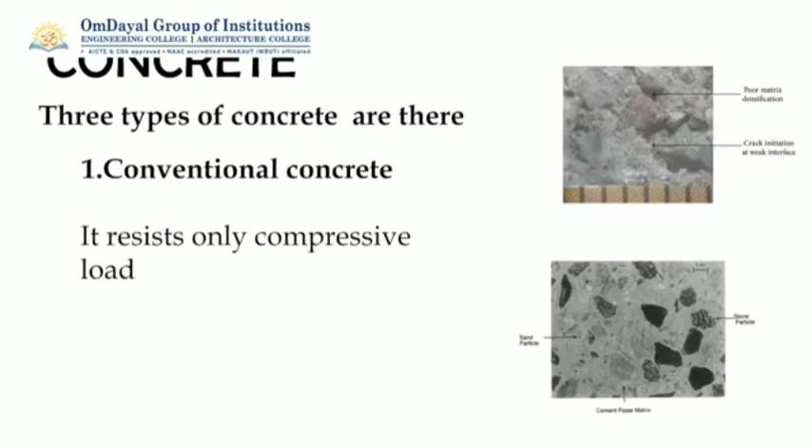Concrete. Three types of concrete are there. Number one is conventional concrete, which was initially expected to resist only compressive loads. Number two is non-conventional concrete, which is task-specific, environmental friendly, and cost-effective. Number three is pre-stressed concrete, which is a form of concrete where initial compression is given in concrete before applying the external load.

Adhesive is also known as glue, cement, paste, which is non-metallic substance applied to one or both surfaces of two separate items. Finishes comprise plastering, pointing, painting, varnishing, and distempering.

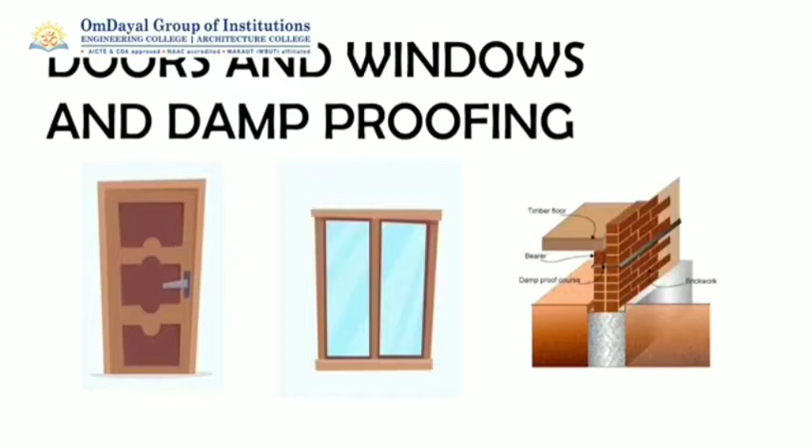In our third semester, we have studied about the materials which are used for doors, windows, and damp-proofing course. Window has basically two parts: one is window casing frame and another is window shutter frame. Window frames are made of timber, steel sections, aluminium sections, concrete, and stone. And the window shutter frame is made of timber, steel sections, and aluminium sections.

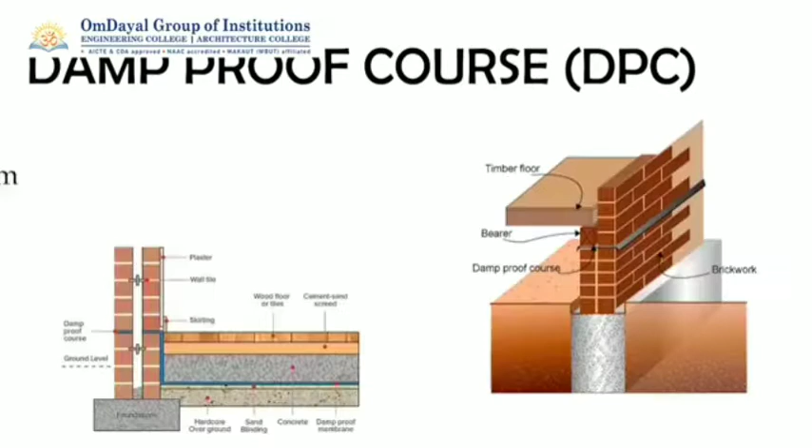The door has also two parts: one is door casing frame and another one is door panel. Door casing frames are made of timber, steel sections, aluminium sections, concrete, and stone. Door panels are made of timber, mild steel sheet, corrugated steel sheet, hollow metal, metal covered plywood. Damp proof course is a course which prevents building from moisture for a long time.

In our fourth semester, we have studied about lintel. It is a horizontal structural member which is placed over the openings like doors and windows. Timber, stones, bricks, reinforced concrete, steels, and reinforced bricks are generally used in lintel.

We have studied about arches also in our fourth semester. Various types of materials like bricks, stones, wood, monolithic concrete, precast concrete, reinforced cement concrete are used in arch construction.

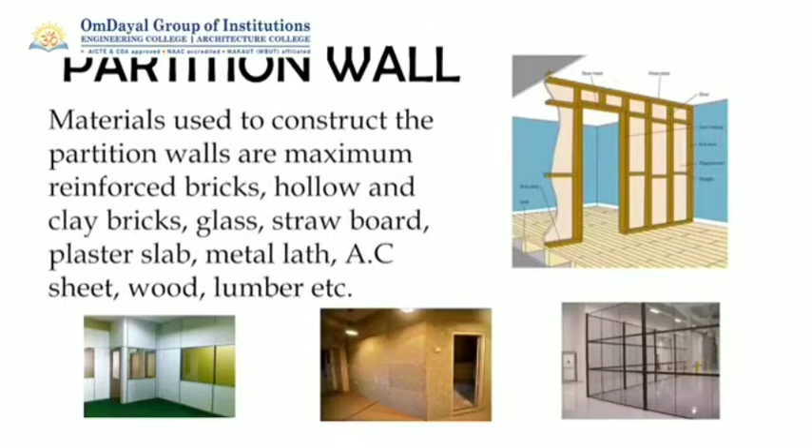In fifth semester, we have studied about partition wall. Generally, the materials used to construct partition walls are reinforced brick, hollow and clay brick, glass, straw board, plaster slab, metal lath, AC sheet, wood, lumber, etc.

Roofing was also studied in our fifth semester. Roofing is an essential part of a building construction. Roofing material is mostly dependent on the climatology of the location of the building.

There are also some new materials that are being introduced in the market. These are known as advanced materials. These materials include polyvinyl chloride, fiber reinforced plastic, etc.

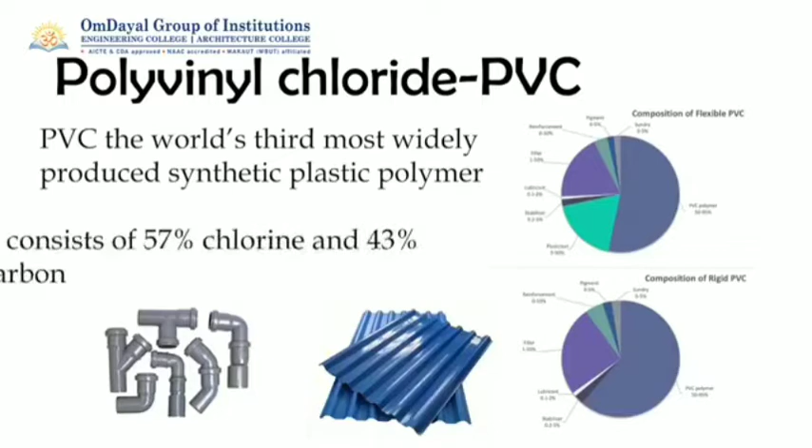Polyvinyl chloride is the world's third most widely produced synthetic plastic polymer. It consists of 57% chlorine and 43% carbon. Fiber reinforced plastic is also the excellent choice of material for the construction of chemical storage tanks, piping systems, etc. There are many other materials that are more durable and fire resistant than the older materials we generally know now.

Foundation. In our third semester, we studied about foundation and its types. Foundation is a substructure placed underground that anchors the building to its position. Foundations are of two types: shallow foundation and deep foundation.

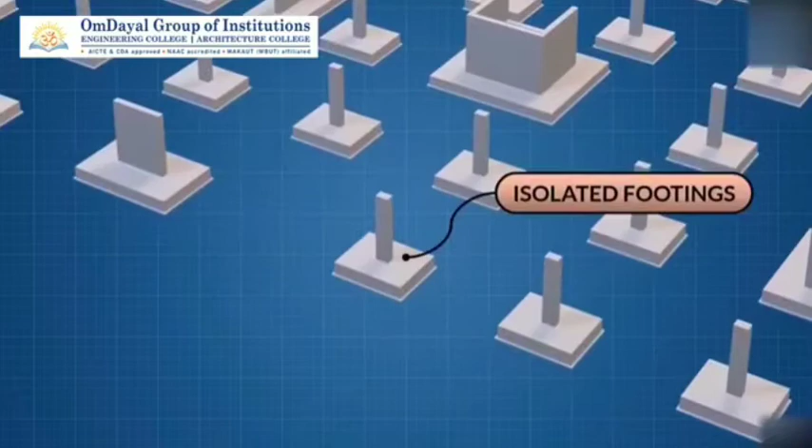Shallow foundations are mainly used in low-rise buildings. The types are isolated footing, combined footing, strap footing, strip footing, and raft or mat footing.

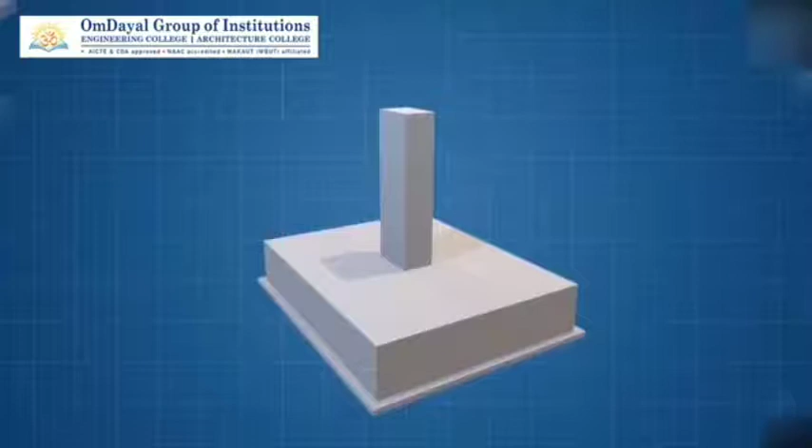The foundation takes the load from the superstructure in the form of vertical or lateral loads or moments. In return, the soil exerts a reaction force upwards that tends to bend the base. The top part comes in compression and the bottom part in tension.

Therefore, the main reinforcements are provided in the bottom. This is how the reinforcement steel bars are provided.

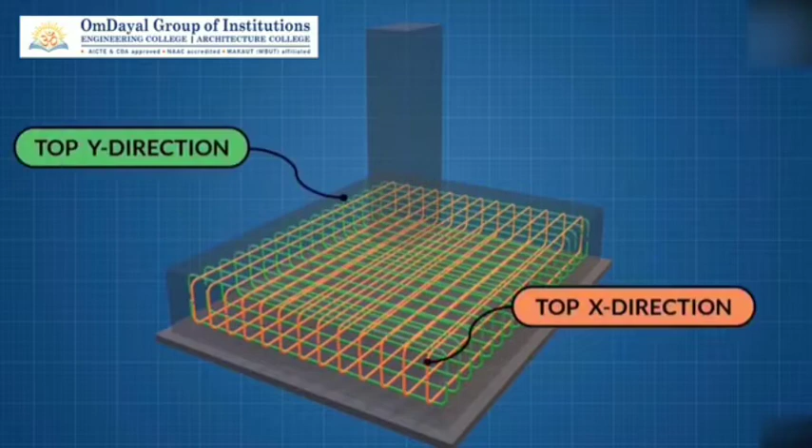After learning about the foundation details, we hand drafted the detail sheets of isolated footing and combined footing. The sectional details and the reinforcement bar placements are detailed in these sheets.

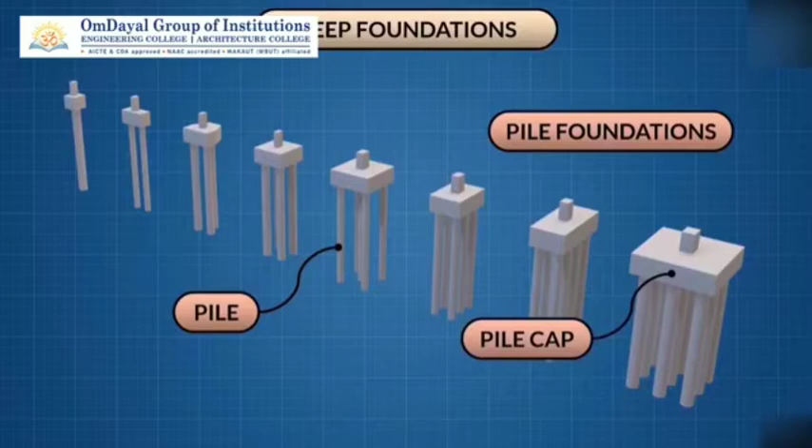Deep foundation is mainly used in high-rise buildings. Piles are long column-like structures made of reinforced concrete or steel. Piles are topped by a pile cap that helps to transfer the load from the superstructure.

Here, in this sheet, we drafted the reinforcement details of pile foundation along with the pile cap details.

Brick bonds. In third semester, we studied about brick bonds and its various types. Brick is a type of block composed of dried clay which is used to build pavements and other various elements of masonry construction. The largest surface of brick is called stretcher. The shorter surface is called header, and the depression of the top surface is called frog.

Four types of brick bonds are generally used in brick masonry. Number 1 is stretcher bond. Number 2, header bond. Number 3, English bond. And number 4, Flemish bond.

Stretcher bond is the commonest bond used today and the least interesting in appearance. It is used mostly in interior settings because of its thickness of one half of a brick. Header bond is a masonry bond consisting of header courses exclusively. It is mostly used for residence and safety partition garden boundary walls.

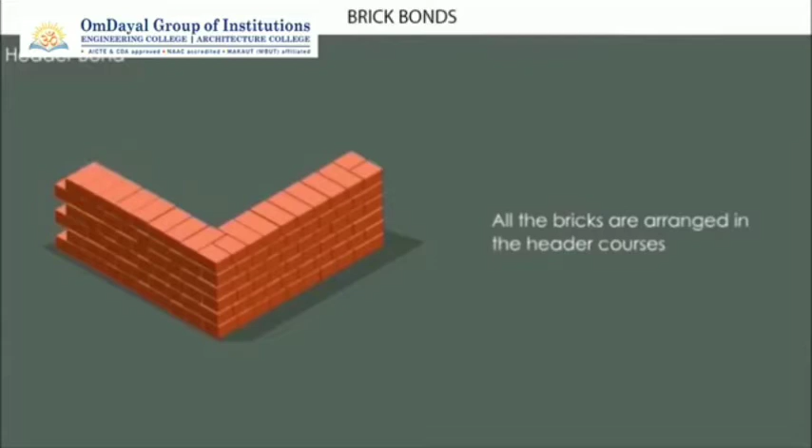English bond consists of alternate courses of header and stretcher bond. This is the most commonly used bond for all wall thicknesses. In this bond, the vertical joints of the header courses come over each other. Similarly, the vertical joints of the stretcher courses also come over each other.

This bond is considered to be the strongest bond. In English bond, every alternate header comes centrally over the joint of two stretchers in the course below.

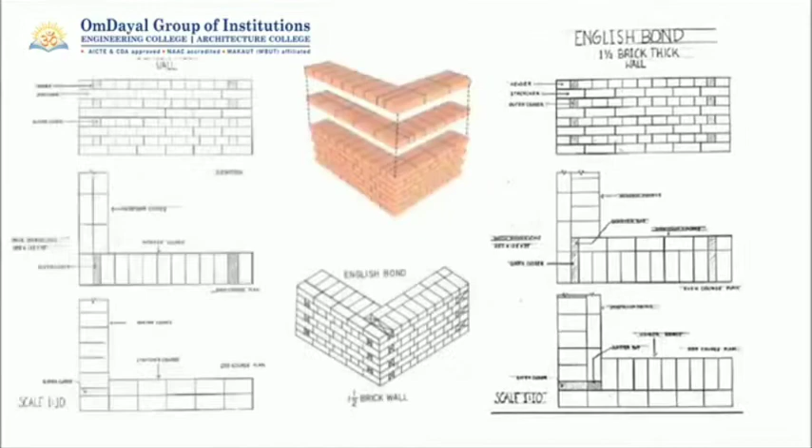Walls of even multiple of half bricks, for example 1 brick thick wall or 2 brick thick wall, present the same appearance on both faces. Walls of odd multiple of half bricks, for example 1.5 brick thick wall or 2.5 brick thick wall, will show stretchers on one face and headers on the other face.

Another one is Flemish bond, which is a brick construction pattern of alternate stretchers and headers for each course. This is very acceptable because it is economical, as brick bats are used. On the other hand, more mortar is used due to the use of bats. But it is hard to build and is comparatively less strong for wall thickness of more than 30 centimeters.

In Flemish bond, partly incessant vertical joints appear in the structure. A double Flemish bond has a similar appearance from both sides of the face in the front and back elevation. In single Flemish bond, the exposed surface of the wall consists of the Flemish bond.

And the backside surface consists of English bond in each course.

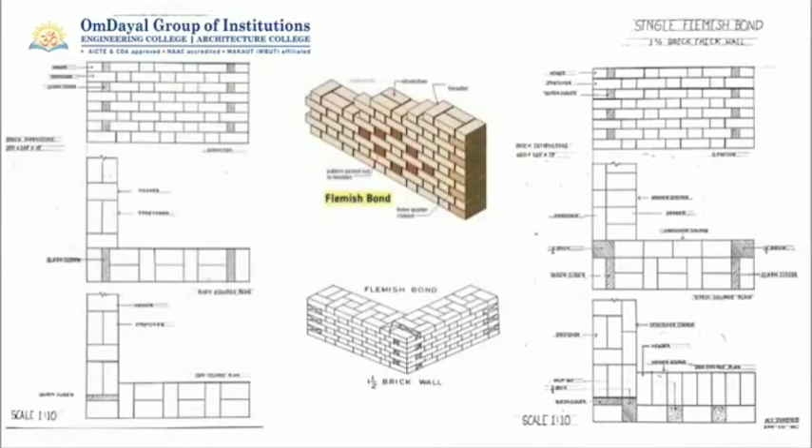This is stone masonry. We have studied about stone masonry and its types in our third semester. Stone masonry is basically of two types: one is ashlar masonry and another one is rubble masonry.

Ashlar is finely dressed stone. In ashlar fine masonry, each stone is cut to a uniform shape. In chamfered masonry, a strip is provided to 25 mm depth at a 45-degree angle, which is why the exposed face is chamfered.

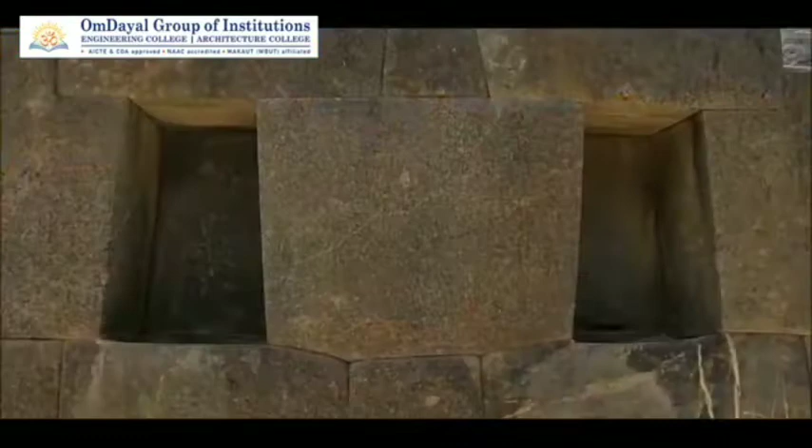Rubble masonry is a type of stone masonry in which the stones are used as obtained from nature. It is roughly dressed with wider joints, in contrast to ashlar masonry wherein stones are given a fine finish and joints are also kept thin.

Rubble masonry is more preferred than ashlar because there is difficulty in dressing most types of stone. And for economical construction also, ashlar masonry is quite costly. That's why rubble masonry is more preferable than ashlar masonry.

Rubble masonry is of two types: one is square rubble masonry and another one is polygonal irregular rubble masonry.

In square rubble masonry, stone faces are given a straight finish, and voids are filled with mortar and stone chips. In polygonal rubble masonry, the stones are roughly hammered and pitched into irregular polygonal shapes.

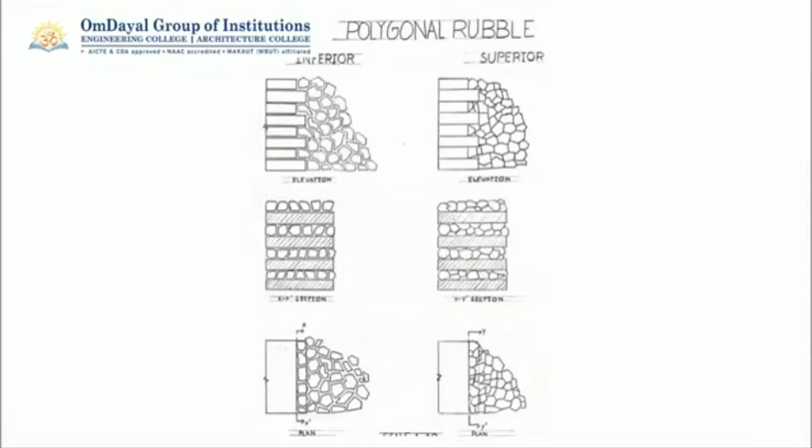The following sheets are from our 5th semester on various types of partition wall.

These are some photographs of hollow clay blocks, which are generally made up of clay or terracotta and are hollow on either side. In reinforced brick, wire mesh or hoop iron or steel bar is provided.

Plaster and concrete partition is constructed by setting 2 by 2.5 cm channels vertically and fixing metal strips. Strips are galvanized with iron wire or mild steel bar. It can be either precast or cast in situ. Special concrete posts are used for the construction of this wall.

Timber partition wall consists of a wooden framework which is either supported on the floor or on the side wall, and is not suitable for damp locations, neither soundproof nor fireproof, but lighter in weight and easy to construct.

Timber framed glass wall consists of glass surrounded with a combination of solid and engineered wood. This type of wall consists of a wooden framework and provides good aesthetics.

For steel frame glass partition wall, the framing is done with steel and this provides maximum sound insulation and security. Mostly this wall can be seen in modern offices, restaurants, and cafes.

At first, steel framework is done and then plaster boards are used on both sides. As a modular, versatile, demountable panel, they can be quickly erected to any configuration required and come in a variety of specifications.

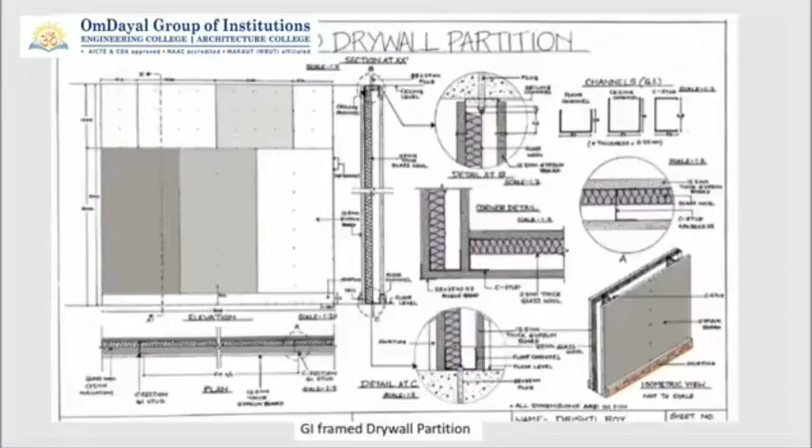Next slide is about GI frame drywall partition wall. Drywall materials include plywood, wood pulp, asbestos cement board, and gypsum. This is a soundproof wall.

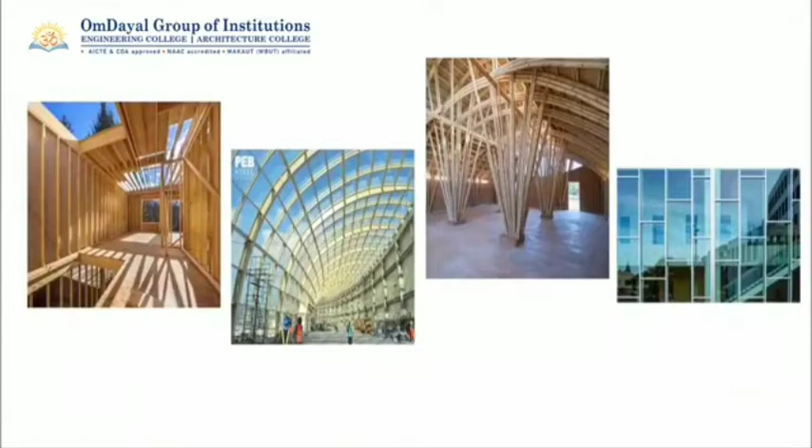Advanced building materials represent a new generation of construction materials which demonstrate exceptional properties. Through this, new technologies are integrated into both residential and commercial buildings and infrastructures to make them smarter, more sustainable, energy efficient, and secure.

The following sheets are based on our assignment to design a stage backdrop. The aim of the design was to make a simple but eye-catchy backdrop for the stage by only using aluminum composite panels.

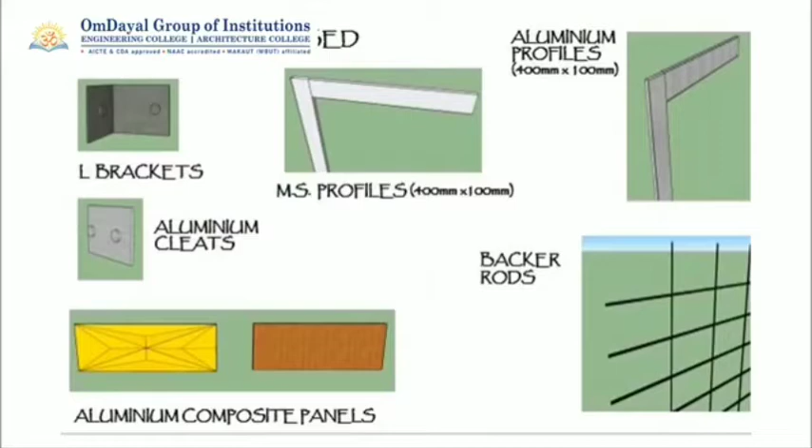The mostly used materials are L bracket, MS profile, aluminum cleats, backer rod, and two types of ACP sheets. The first type is extruded gold finish one, and the second one is the wood finish flat ACP.

At first, L brackets are fixed on the wall, then the basic framework is created using the MS profile, and after that it is overlapped by aluminum profile. Then ACP sheets are placed, and backer rods are run between the grooves.

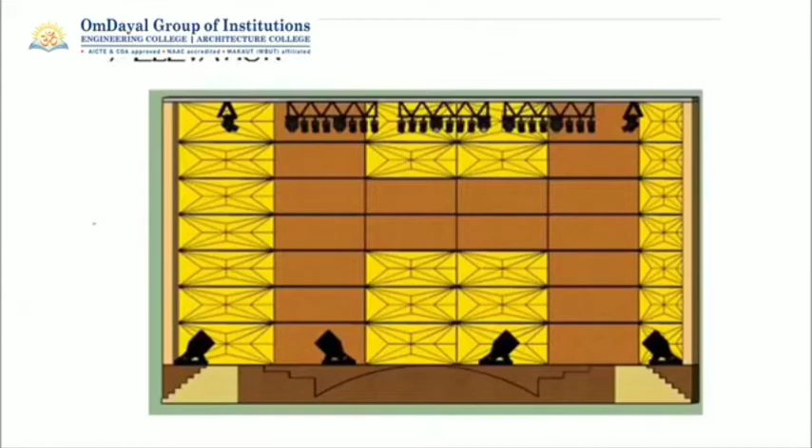The design has been done surrounding the idea of contrast and texture. The contrast developed between the shiny extruded and matte finish flat appearances of the ACP is the main design concept. The band of wood finished ACPs running in between the gold ACPs breaks the monotony of the backdrop while also emphasizing the whole design. The 3D form of the ACP panels will create different visualization of the backdrop.

For the other one, the inspiration is taken from the De Stijl art movement, emphasizing the strict cubic form with primary colors. The design was done for a NAAC room wall where the achievements will be hung. The basic framework is installed with holdfast on the wall, then ACP layers are added. Finally, the logo is placed on the transparent vinyl sheet.

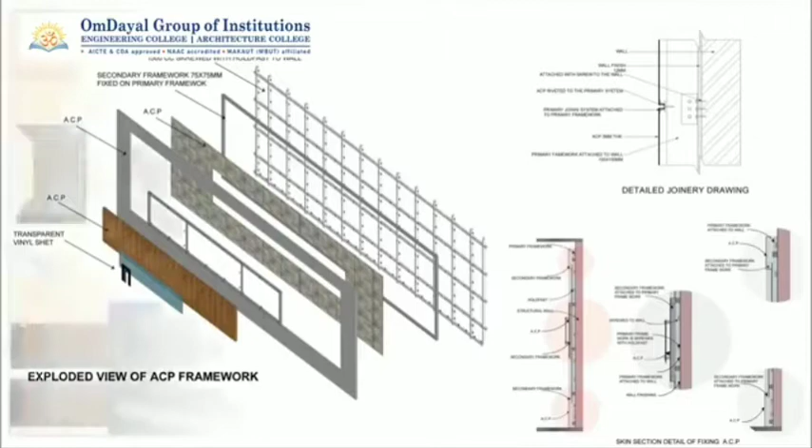And lastly, these are some other examples.

A segmental arch is a type of arch with a circular arc of less than 180 degrees, sometimes also called a scheme arch. A flat arch is an arch with a flat lower or inner curve.

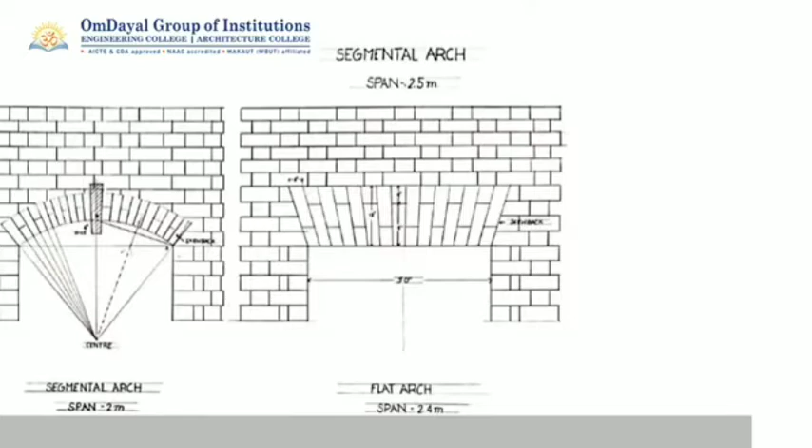Some other types of arches are lancet arch, equilateral arch, horseshoe arch, three-centered arch, and four-centered arch. A lancet arch is one of the varieties of pointed arch in which each curve of the arch has a radius longer than the width of the arch.

Equilateral arch is a two-centered pointed arch in which the chords of the curve are equal to the span. Horseshoe arch is also called a Moorish arch or a keyhole arch. It can take a rounded, pointed, or lobed form.

Three-centered arch: an arch whose inner curved surface is struck from three centers, resulting in a shape of one half of an ellipse. Four-centered arch is a low, wide type of arch with a pointed apex. Its structure is achieved by drafting two arches which rise steeply from each springing point on a small radius.

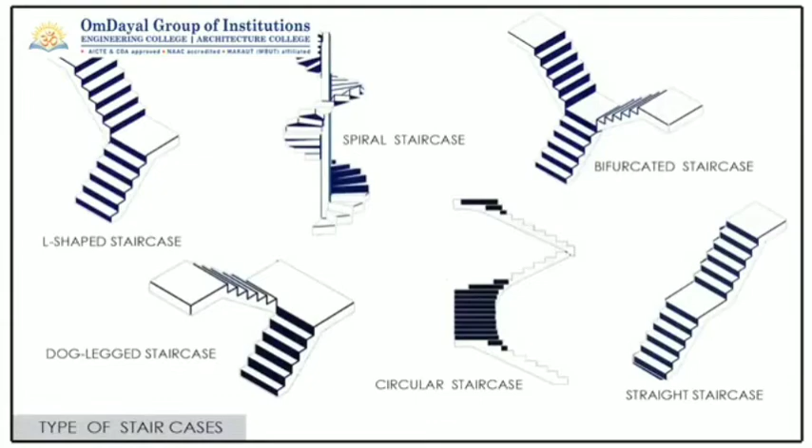Staircase. In our fourth semester, we studied about staircases. The different types of staircases are L-shaped, dog-legged, spiral, circular, bifurcated, and straight.

L-shaped staircase. Dog-legged staircase. Spiral staircase. Circular staircase. Bifurcated staircase. Straight staircase.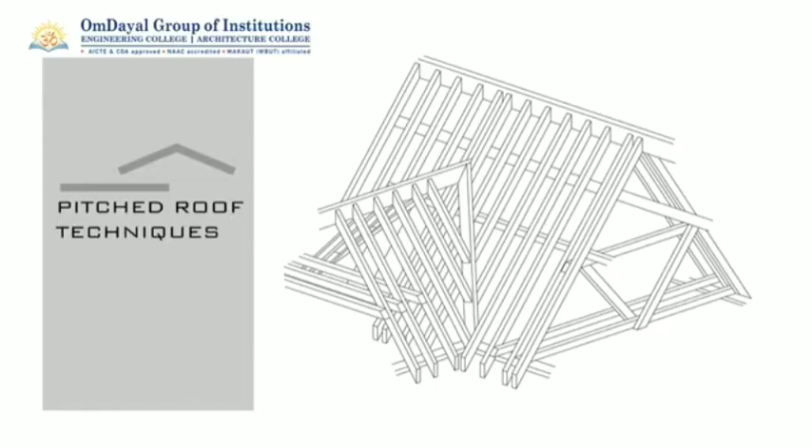In our fourth semester, we got to know about the pitch roof and its building techniques. What is a pitch roof? A pitch roof is a roof that slopes downward, typically in two parts, at an angle from the center ridge.

Here are some of the sheets which are drafted by us in our 4th semester, which contain the detail of the pitch roof and its different parts. This sheet contains the plan of the pitch roof, the section of the pitch roof, the detail of the edges of the pitch roof, and some elaborate drawing of the pitch roof.

In this sheet, we can see a different type of pitch roof which is covered with interlocking tiles, and its main supporting members are rafters and joists.

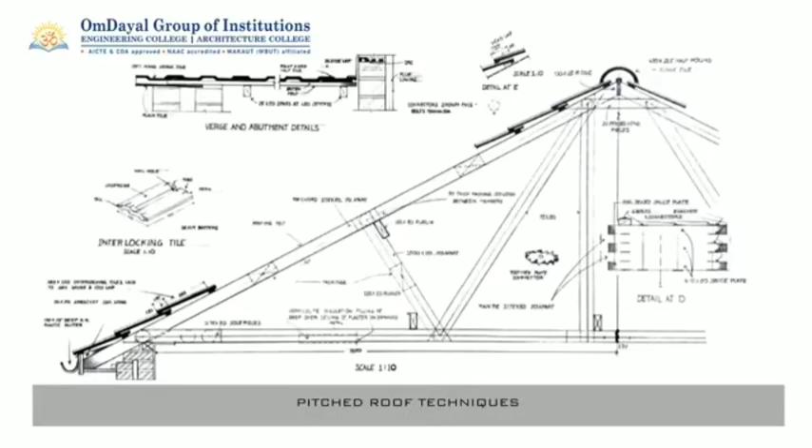Now there is a small video regarding the roof construction technique in which we are using joists and rafters for the roof construction. Rafters are rectangular section and they fit nicely on the wall plate.

Another type of section used in construction of roofs are purlins, which are associated with struts, and they provide extra support to the rafter, adding extra strength to the roof. The purlins are found at right angles to the rafters, and struts are found on every 4th rafter. Then there are hangers which are found at right angles to the joist, keeping a strong roof.

In the following slides, we are going to learn about the floor slabs which you learned in the 4th semester. A floor slab, also known as a plate slab or filigree slab, is a reinforced concrete slab with a minimum thickness of 5 to 6 cm. Depending on the concrete covering and reinforcement, it can be up to 7 cm thick. Now in this slide there are shown steel joists.

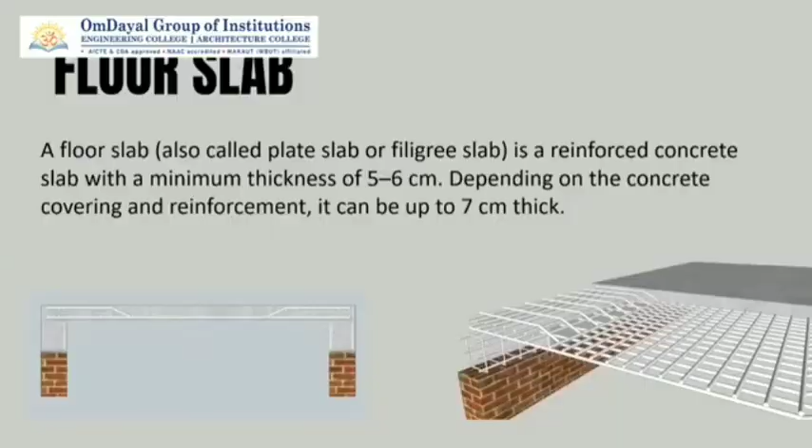The steel joists are open web lightweight steel trusses consisting of parallel chords and a triangulated web system, proportioned to span between bearing points. There are 5 main components of a steel joist: the top chord, bottom chord, end web, bearing seat and interior web members.

In this slide we can see details of a jack arch roof and how it is constructed. A jack arch roof is composed of arches made of either brick or lime concrete. In this animated video we can see the construction of a jack arch roof.

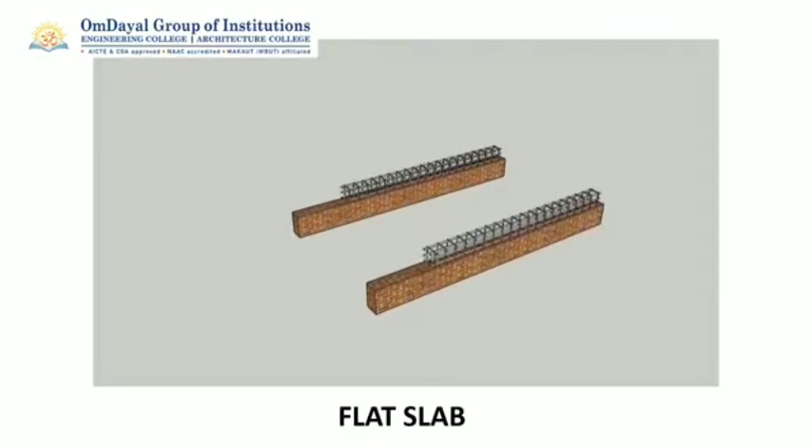In this slide we can see the plan, elevation and sections of a flat slab. In this following animated video we can see the construction of a reinforced flat slab.

We have learnt about the types of wooden joineries and the construction system in the 2nd and 3rd semester. A joinery is a part of woodworking that involves joining pieces of wood or timber to produce more complex items. We have studied the making of these wooden joineries in the 3rd semester.

First, in this slide it is shown a fish joint. When it is desirable to join 2 members without reducing their section to a certain extent, then that joint, as shown in the figure below, is known as a fish joint. Here are some animated videos showing the construction of the fish joint, strap and bolts joint.

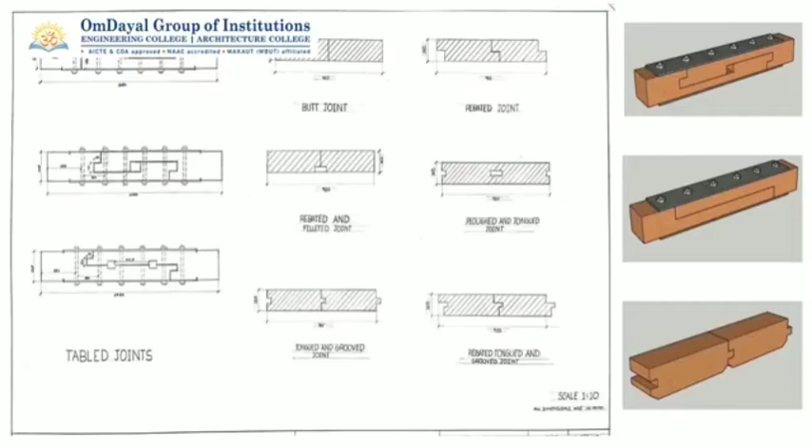In this slide we can see the table splice joint, butt joint and lap joint. Table splice joint is another variation of the half lap joint. Butt joint: the end of a piece of wood is butted against another piece of wood. Lap joint: when the end of a piece of wood is laid over and connected to another piece of wood, it is known as the lap joint.

These videos also help us explain the construction systems of the table joint, matched joint and V-joint.

In this slide we can see types of widening joints. Widening joints are used to make wider boards by joining the narrower ones edge to edge. These videos help us understand the construction systems of the angled half joint and the bevel half joint.

Now in this slide there are shown many types of joints like the dovetail joint, notch joint, mortise and tenon joint, and chase mortise joint. A dovetail joint, or simple dovetail, is a joinery technique most commonly used in carpentry, including the making of furniture, cabinets and traditional timber framing.

Mortise and tenon joints are strong and stable joints that can be used in many projects.

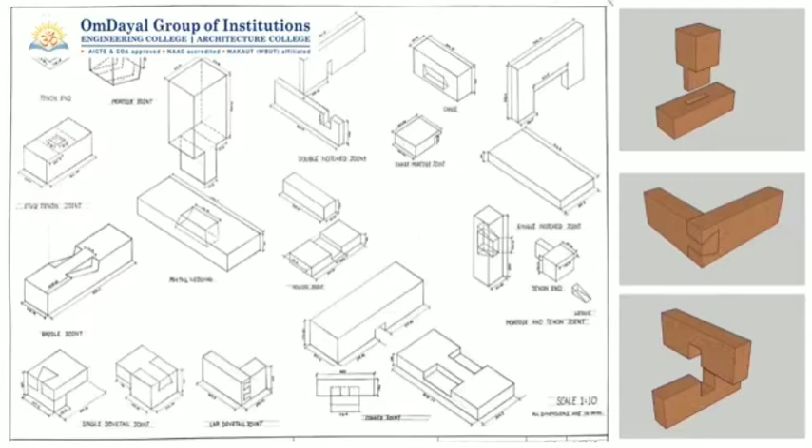Here are some animated videos and also a video of our respected teacher showing the construction of a dovetail joint, along with animated videos of the types of dovetail joints.

In this slide we can see many types of joints shown like a housed joint, miter joint, bird's mouth joint, and oblique tenon joint. In the housed joint, the whole end of one piece of timber is accommodated or housed for a short distance into the other piece, the construction of which our respected teacher is showing.

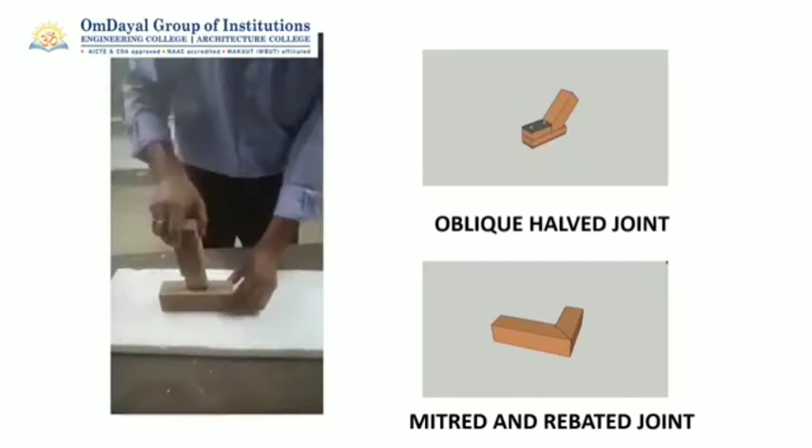We have learned about doors and windows in the 2nd and 3rd semester of our course.

There are different types of windows with different structure and function, such as fixed windows, casement windows, awning windows, double hung windows, etc. Let's have a look at the ventilation openings of the most common window types.

Fixed windows, no matter what size, offer no ventilation at all. Next is the awning window, which severely limits the amount of opening and offers very little ventilation in respect to its size. For the larger ones, the lower panes are normally fixed, which further reduces the amount of ventilation.

Sliding windows have a fixed pane of glass which prevents ventilation. In larger ones, additional fixed panes can be found which further restricts the ventilation.

In double hung windows, half of the window pane is fixed, so the ventilation through it is moderate. For larger ones, the portion of fixed panes increases and the ventilation amount decreases.

As casement windows open perpendicularly, they allow ventilation through the entire window area. For larger ones, 1/3 of the window pane is fixed, which decreases the amount of ventilation.

Louvered windows have no fixed panels; the blades open horizontally. This type of window allows ventilation through the entire part of it. Even for large ones, the amount of ventilation is comparatively higher than any other windows. So if we represent graphically the amount of ventilation these kinds of windows offer, here comes the result.

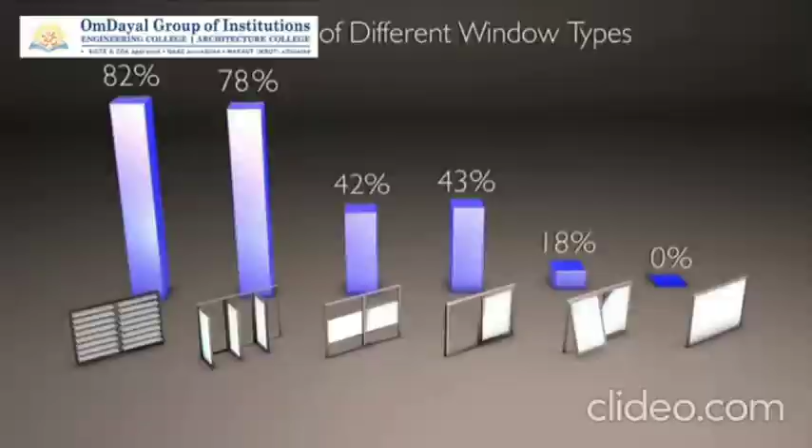The size and materials of a door may vary as per the location and their requirements. For a toilet, the door size is kept minimum; for a room it is moderate; and for other areas the size of a door increases. The materials and size of a door depend on the users of a particular place.

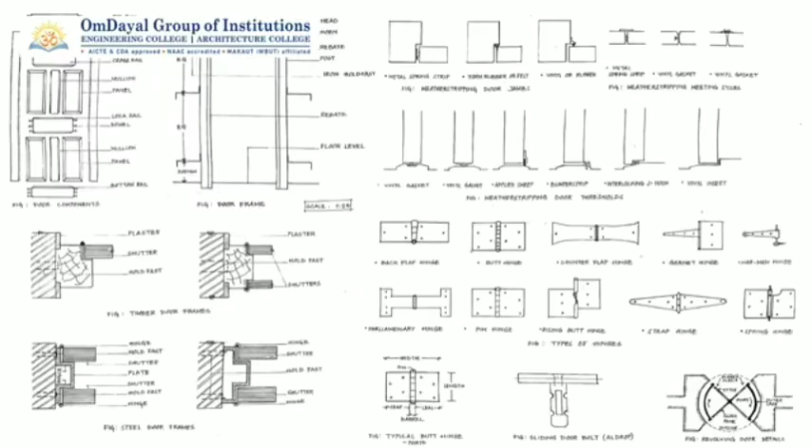We have also learned about choosing the location of a door or a window. For the best space utilization, the number of doors should be kept minimum, but at least 2 openings should be there. If there are 2 doors in a room, they should preferably be located in opposite walls facing each other so as to provide good cross ventilation and free circulation of air in rooms.

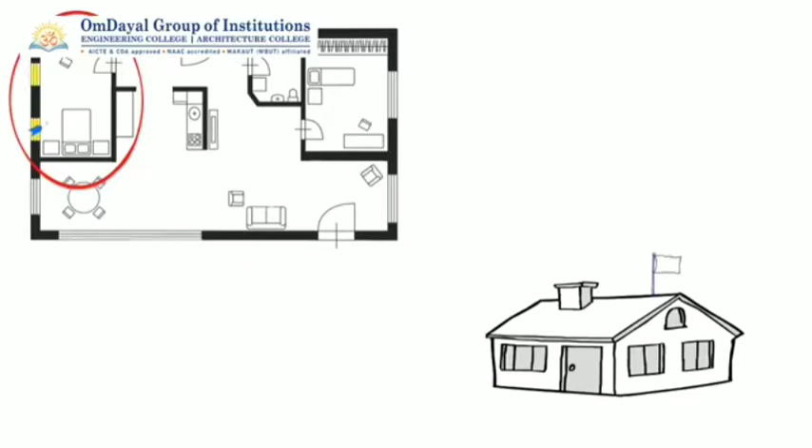If the windows are placed adjacently, the cross ventilation works very poorly. If in a room the openings are in only one wall, or the windows are placed adjacently, the possibility of cross ventilation becomes very limited. According to the National Green Building Standard, for proper ventilation, the size of the window should be 15% of the total conditioned area.

False ceiling is a topic which we study in 5th semester - metal furring. Suspended ceiling is a secondary ceiling hung below the main ceiling, also named as drop ceiling or T-bar ceiling. Its purpose is basically aesthetic at residences, and also insulating and acoustical at commercial buildings.

Here one type of metal furring suspended ceiling is drawn by us. Here we have shown the reflected ceiling plan, isometric views and all the details about components.

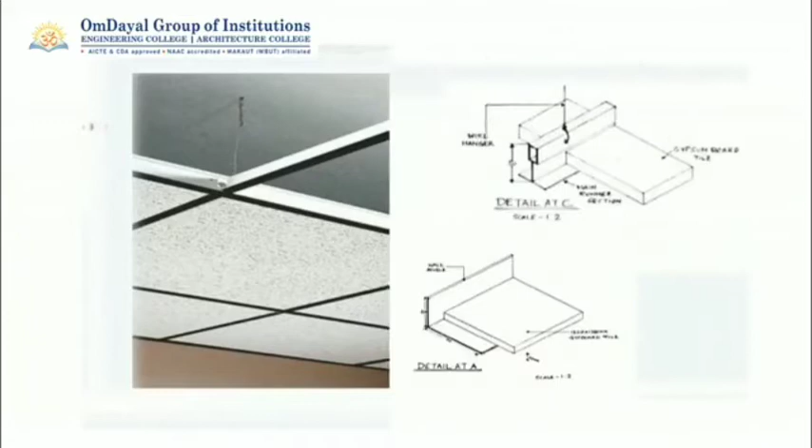Another type of ceiling is BPB grid ceiling. Here we have shown the ceiling plan, section and isometric view, and we have also done some details of wall angles, and the joint of main runner and cross runner. Here the wire hanger provides the suspension from the structural ceiling.

BPB ceiling tiles are used in conjunction with the Casoline grid ceiling system. This is a new design from BPB which is highly popular in both Europe and UK because of its specially designed characteristics in terms of sound control performance, aesthetics as well as durability.

In this sheet we have drawn all the details of gypsum board drop ceiling. This is basically used for acoustical purposes at theatre halls as it has highly sound absorption property. It is lightweight, flexible and fire and moisture resistant.

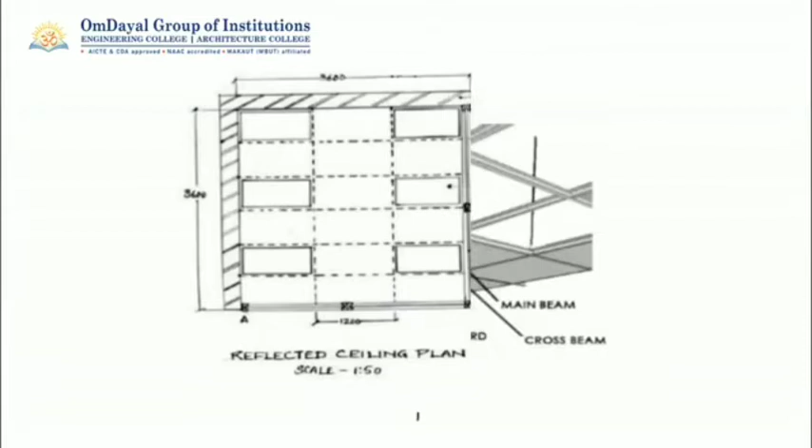Gypsum board panels are tough and economical and are fast replacing other ceiling materials such as plaster of Paris, as they are used for renovating old ceilings too.

Working drawing: drawings for the proper construction of a building, for carrying out the various trades in accordance with the design or intention of the architect, and for obtaining estimates of cost. They consist of plans, elevations, sections and details augmented with specifications. Purpose: the primary role of working drawings is to convert design data into construction information and to clearly communicate that information to building industry code officials and fabricators.

Municipal drawing or sanction drawing: these are the drawings prepared for obtaining sanction for the project. The sanctioning authorities have their own checklist of drawings to be submitted. Purpose: to get sanction from competent authority before starting actual work, to check whether the proposed construction is as per bylaws or not, and to decide the taxation of the building by municipal authority.

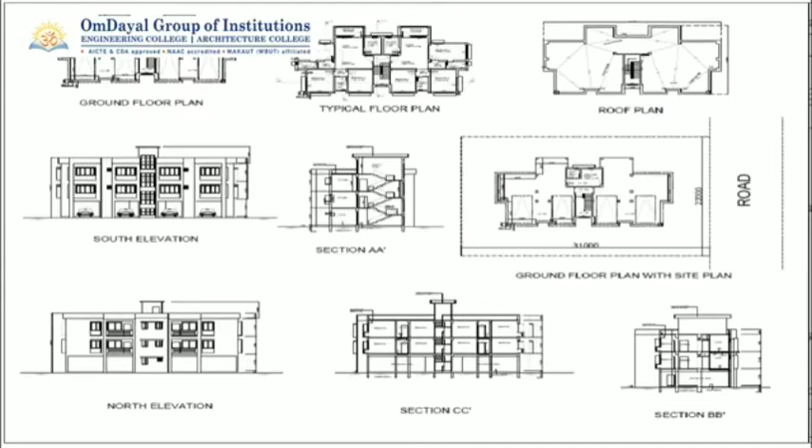Without sanction of drawing, any construction if constructed is illegal. At villages, the drawings are sanctioned by panchayat. At town by municipal bylaws, and in cities by corporation bylaws.

For getting approval of the plan, also even after approval, number of copies are required for obtaining financial assistance, electric supply, water supply connection, etc. These copies of plan can be obtained by ammonia print.

We have studied plumbing services in 5th semester. Public water supply consists of collections, conveyance, treatments and distribution. Water is conveyed from the street mains to the individual building through service connection and collected in underground tank.

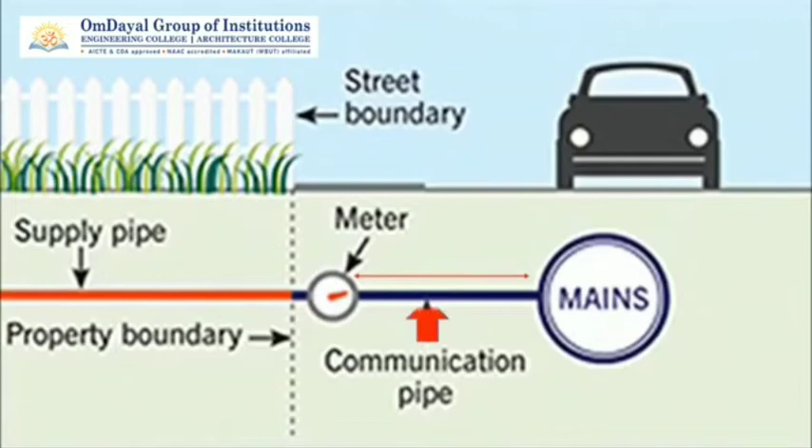Service connection consists of two types: communication pipe and supply pipe. The pipe which runs from the municipal distribution mains to the boundary of the premises is known as communication pipe, and the pipe which runs inside the premises is called supply pipe. In this picture, we are able to see the details of service connection.

Internal water distribution system depends upon the size and height of the structure. These are the basic methods of distribution system depending on the pressure of the water and gravity. Direct supply system: in case of buildings which are not more than 2 floors, and if adequate pressure is available in the mains, supply of water is directly given to various floors for sufficient hours.

Indirect supply system: when the pressure in the mains is not sufficient, the water is pumped directly to the overhead storage tank, and from there water is distributed to different floors by gravity.

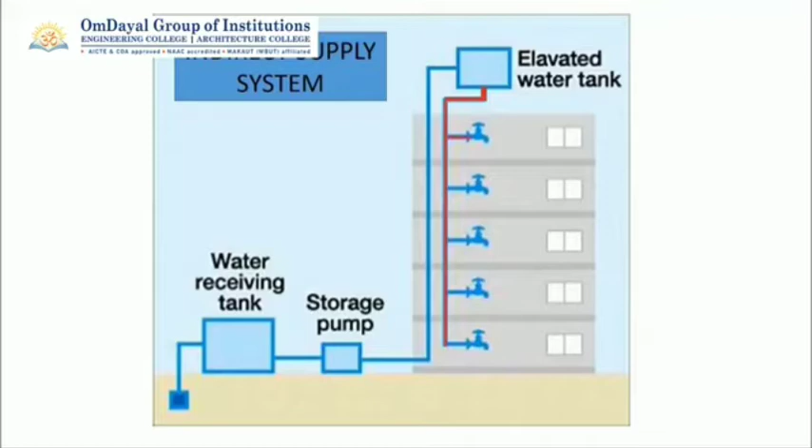Gravity system: in this system, water flows under gravity without use of any external energy to deliver water from source to consumer. Water distribution system for a town depends upon the level of the source, topography of the area, and some other local conditions. In this sheet, we have discussed about pumping system and combined gravity and pumping system.

Pumping system: treated water is directly pumped into distribution mains without storing. This method is not generally used.

Combined gravity and pumping system: this is the most common, efficient and economical. Treated water is pumped and stored in an elevated distribution reservoir, then it supplies to consumer by action of gravity.

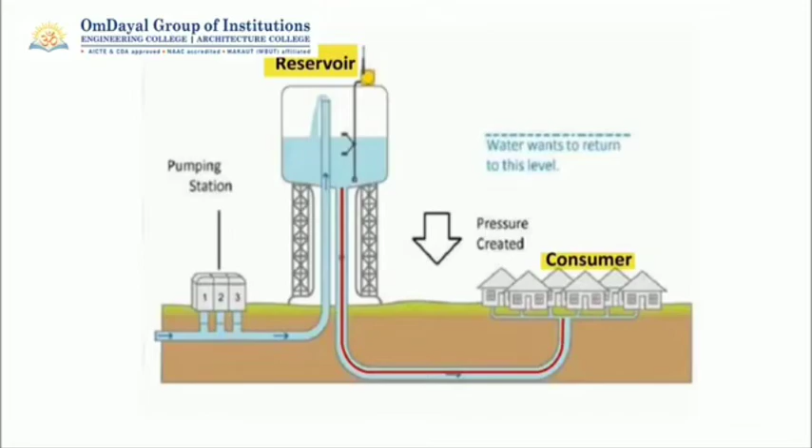We all know about the importance of light in our life. It stimulates our sight and makes things visible to us. Architectural illumination is the lighting that applies to the built environment. Lighting in museum is important for displaying the exhibits and for the movement of the visitors. Gallery lighting requirements vary with function, type and the size of work.

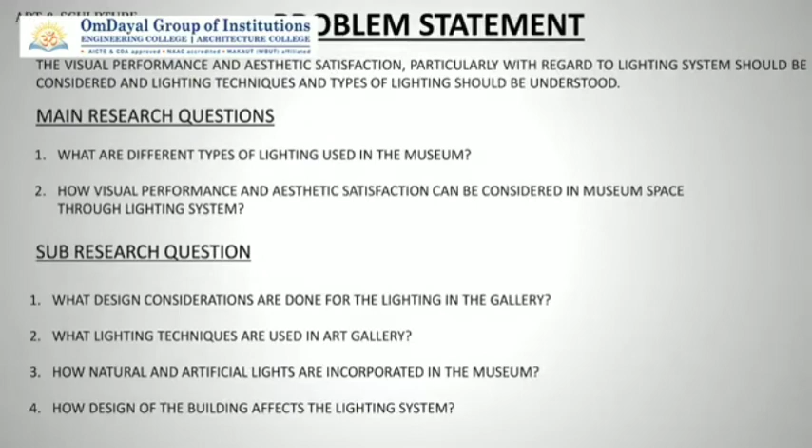When many different objects are displayed in a single exhibit, lighting designers must sometimes light the space so that certain objects are illuminated with bright or dim light, light that is warm or cool, using deep or shallow angles and a variety of fixtures and sources. As many art museum exhibits change frequently, lighting design must be flexible and easy to customize for new objects and collections.

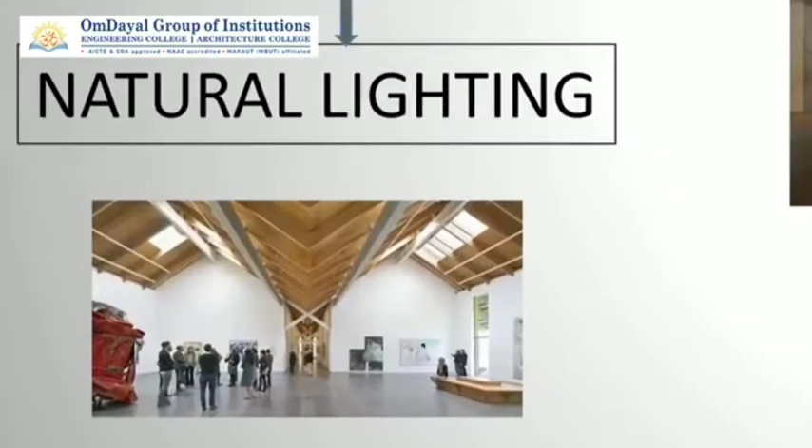Museum lighting can be done in two ways: natural lighting and artificial lighting. Natural light plays a major role in museum construction and design. It is of two types: top lighting and lateral lighting.

There are a few advantages and disadvantages of the top lighting system. There are three types of top lighting: skylight, atrium, and roof monitor.

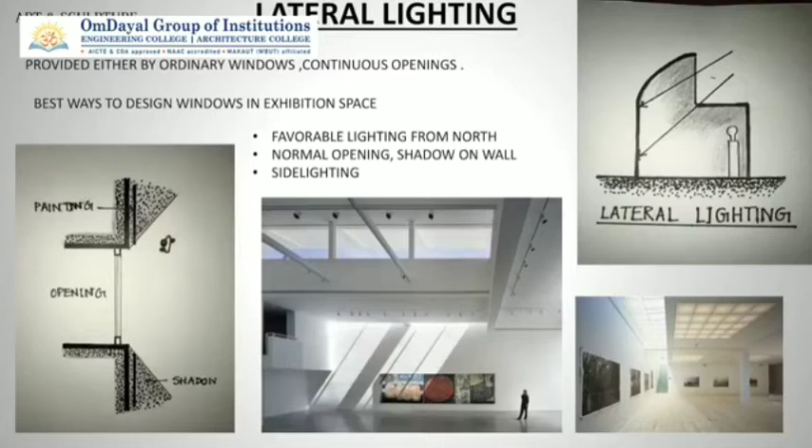Lateral lighting is provided either by ordinary windows or continuous opening. Best ways to design windows in exhibition space are: 1. Favorable lighting from north, 2. Normal opening shadow on the wall, 3. Side lighting. There are 4 types of lateral lighting:

1. Vertical windows, 2. Horizontal windows, 3. Clerestory windows, 4. Window wall. The factors of daylight design considerations are as follows.

1. Site building to maximize daylight availability. 2. Building orientation. 3. Building form. 4. Use of low-rise buildings for greater daylight access. 5. Use of the atrium to maximize core daylight.

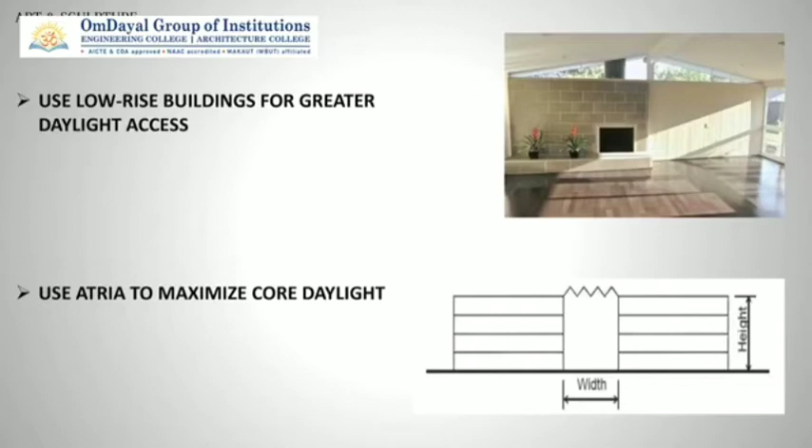Artificial lighting is the light that we get from the electric source. The form of the lighting can be divided into two types: 1. Diffuse lighting, 2. Directional lighting. Some different types of artificial lightings are luminous ceiling lighting, indirect luminaries, cove lighting, wall washer, spot lamps.

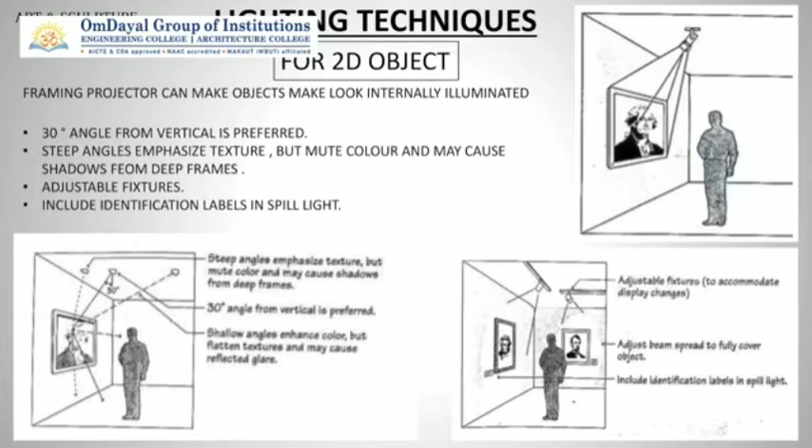For 2D objects, a 30-degree angle from vertical is preferred. Steep angles emphasize texture, but mute color may cause shadows from deep frames. Adjustable fixtures include identification labels in spill light.

For 3D objects, lighting techniques can be divided into 5 types: directional lighting, point lighting, area lighting, spot lighting, and global illumination. Apart from creating a good visual environment for the audience, the museum's lighting environment should also focus on protecting exhibits and reducing the damage to cultural relics caused by light radiation.

It is observed that lighting plays a decisive role in the display space. Guggenheim Museum is a good example where we can find fine use of natural and artificial lighting. The 45-degree plastic louvers have been placed to deflect the sun rays. For the best use of light, all the walls, including the floors and ceilings, have been painted with high reflectance matte white.

When it comes to exhibition areas, lightings have to be very carefully designed, as it should not only convey the brilliance of the exhibit but also maintain the overall lighting required. This is done either by natural or artificial lighting, or by a combined strategy.

The intent of this research is to explore qualitative aspects regarding lighting used in museum architecture and the psychological impact of lighting on human behavior.

In the 7th semester, we study structure in architecture. This subject teaches us about the different types of structural systems in advanced architecture. This is a sheet done by us.

These are the classifications of form active systems: number 1, tensile structure; 2, cable structure; 3, pneumatic structure; 4, arch structure.

Tensile structure is a common type of thin membrane structure which only carries tension stress, and no bending or compression. In the next slide, you will see a small animation or video regarding a tensile structure.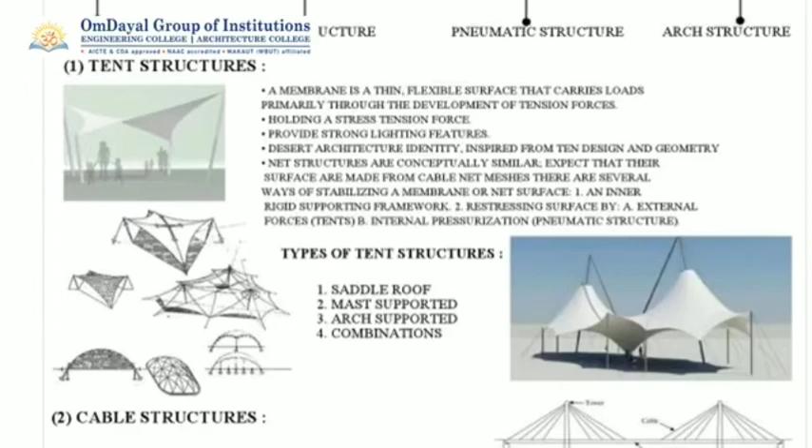Cable structure comprises non-rigid, flexible cables shaped in a certain manner and fixed at the ends to span the space. Pneumatic structure is a membrane which carries load developed from tensile stresses.

Arch structure: an arch structure is a curved surface that spans over an elevated space. These are some of the examples of the structures we learned before.

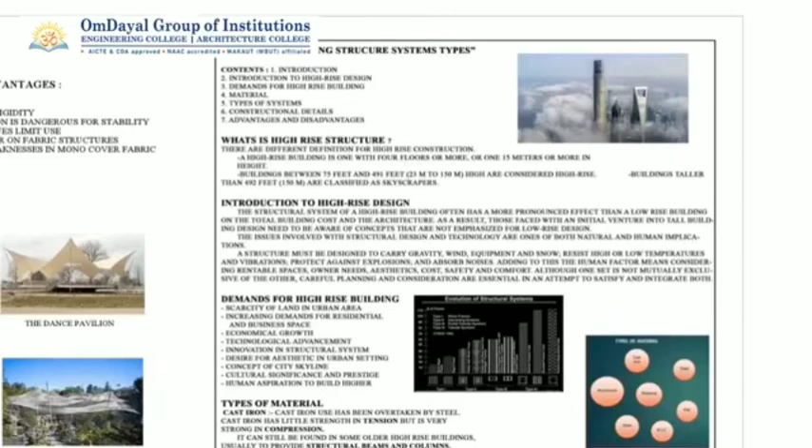High-rise building structures are buildings between 75 feet and 491 feet, and taller than that are classified as skyscrapers. Some materials used in these buildings are cast iron, float glass, etc.

Vector active structure system: this system consists of linear members joined together with hinge joints, in which members develop either axial compression or tension but no bending. Classifications are flat truss, curved truss, space truss, and tree truss.

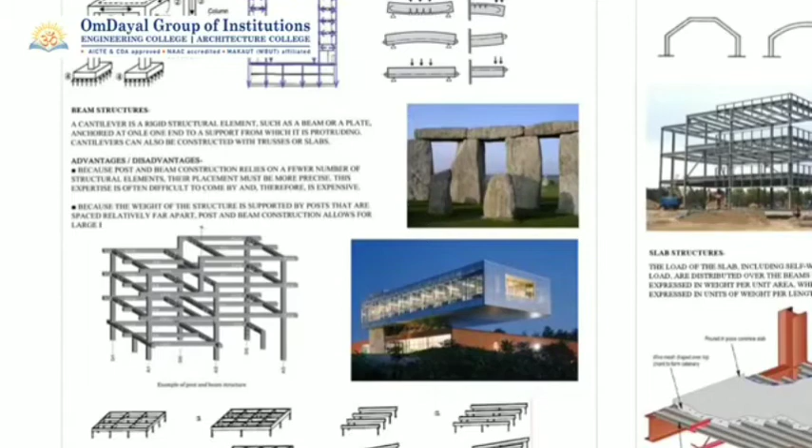Shell structure: a shell structure is defined as a curved structure that is capable of transmitting loads in more than two directions. These are the different types of shell structure: number 1, single curvature shell structure; number 2, double curvature shell structure. Under single curved shell structure, there are barrel shell and conoid shell.

It is a very sustainable structure that can bear a lot of load and does not break easily. There is a snack company called Pringles which uses this shape for the snacks, which makes the product non-fragile and keeps it intact so it does not get broken into small pieces. In the next slide, you will see a small video on this structure.

Climatology is the study of climate and how it changes over time. It is a very important aspect in architectural designing.

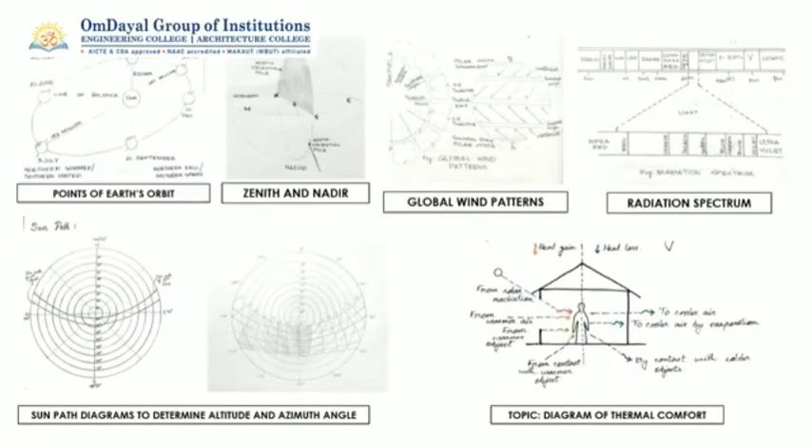These are a few basic concepts of climatology. Points on Earth's orbit show the climatic variation on Earth due to revolution around the Sun. Zenith and nadir are the two poles of the horizon.

Global wind pattern shows the different wind patterns of the northern and southern hemisphere. Radiation spectrum shows the different radiation, emphasizing the visible spectrum range. Sun path diagram is used to determine altitude and azimuthal angle. Diagram of thermal comfort shows the ways of heat gain and heat loss inside a building.

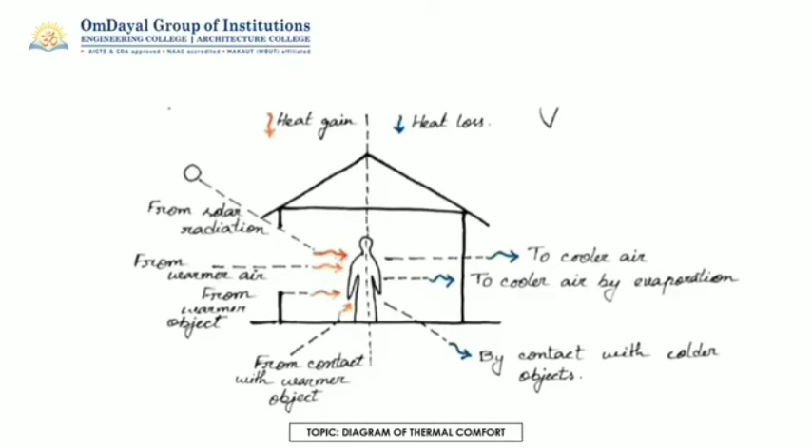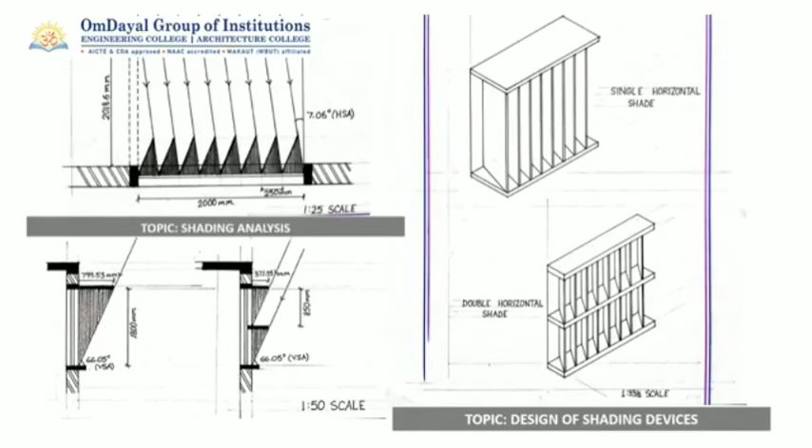Fenestrations and shading devices. Shading devices are mainly of two types, horizontal and vertical. These are used to protect the interior of the building from excessive solar radiation and precipitation.

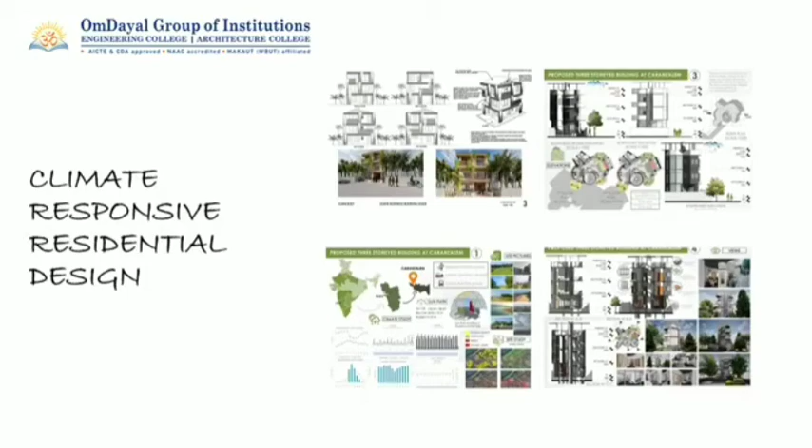We were assigned to design a climate-responsive building for a given climatic condition. The first project was to design a 3-storey building at Caranzalem, Goa. Goa features a tropical monsoon, warm and humid climate. The sun path diagram shows the daylight hours and shadows obtained for the building.

The graphs here show the average temperature, rainfall, wind speed, humidity and sun hours. Here are some pictures of the site and its locational details. After the studies, this is the proposed site plan.

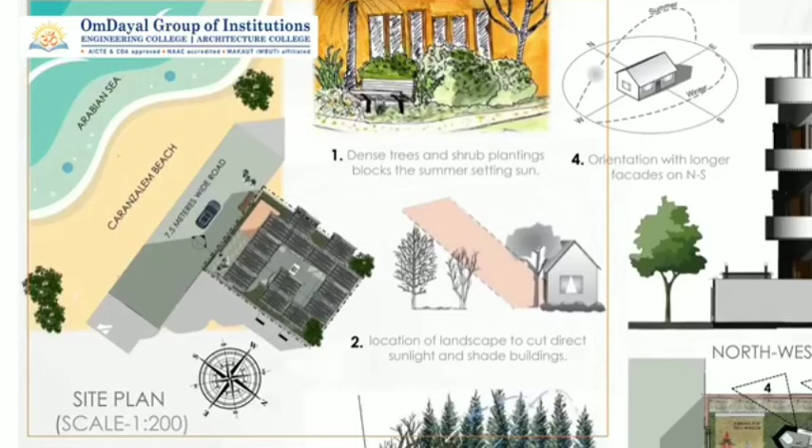The concepts taken are plantation of dense shrubs and trees for blocking the summer setting sun and providing natural shade by cutting the direct sun rays. The positioning of the trees is kept such that it can cut the strong winds. The orientation of the building is kept north-south, and the geometry of the envelope is kept circular.

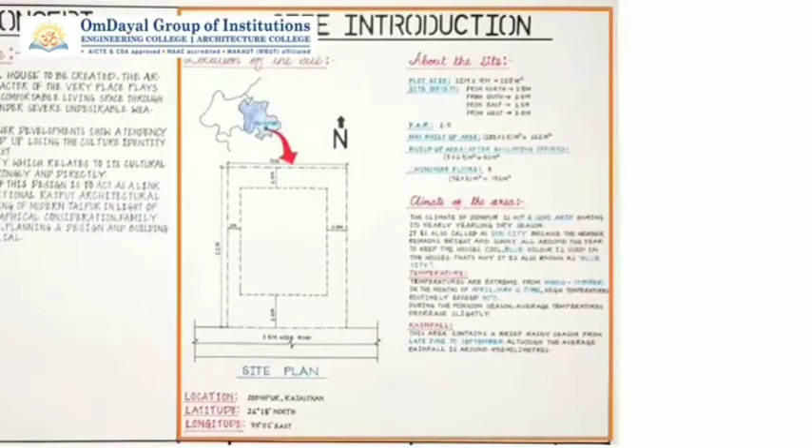The second project was to design a climate-responsive building for Jodhpur, Rajasthan. The climate of Jodhpur is hot and semi-arid. The concept was to design a residential building that portrays a blend of traditional Rajput architectural style with a modern design approach best suited to the climate and the requirement of the users. These are some of the idea illustrations used for fenestration and shading.

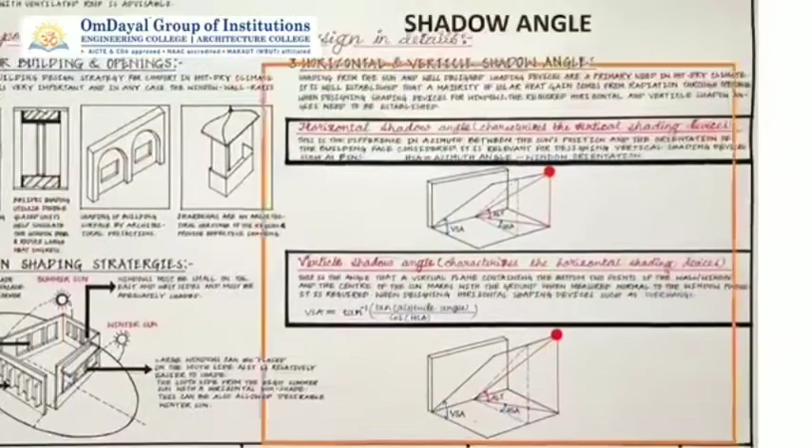Placement of fenestrations was decided along with the shading devices according to the orientation, and the shadow angles were calculated. The sun path diagram of the location was read and observations were noted. The shading devices for the western and southern facades are shown here.

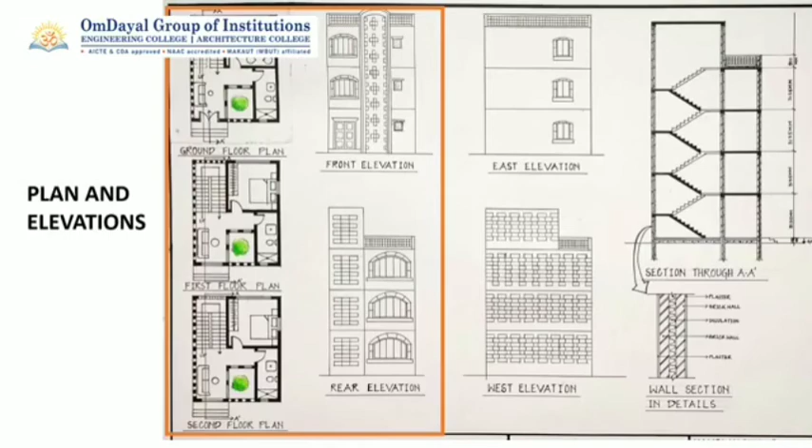The materials chosen are reinforced hollow brick, which are good insulators of heat and sound. Internal courtyard formation for natural airflow and wind movement was considered part of the design. These are the plans, elevations and sectional details of the designed building.

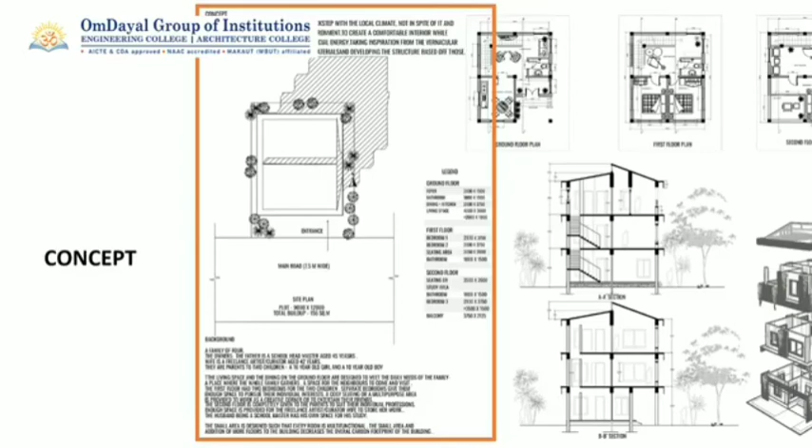The design concept focuses on taking inspiration from the vernacular architecture of Kovalam and integrating it with modern construction techniques, also reducing the building's dependency on artificial energy. This is the proposed site plan and these are the sectional details along with an axonometric view.